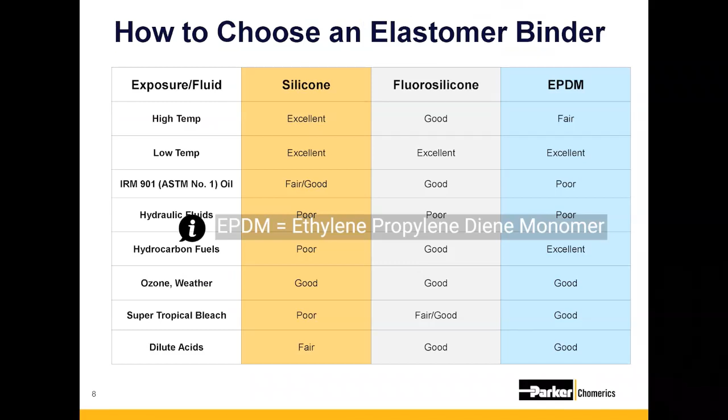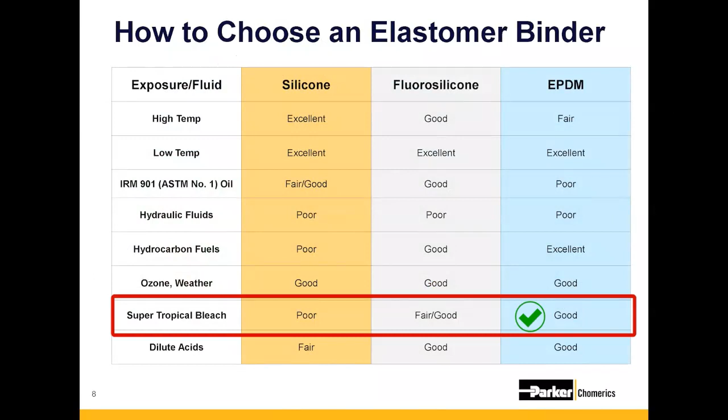So Ben, I see that there's 3 different elastomer binders: silicone, fluorosilicone, and EPDM. I'm working on a ground-based vehicle application right now, and they said something about a super tropical bleach. Yeah, so as you can see, we do have 3 different binder options here. For your specific application, especially when it comes to super tropical bleaches or CBRN requirements, EPDM is definitely going to be the best option. Silicone's a pretty common option for most applications, except when it comes to interacting with hydraulic fluids or various fuels. That's where fluorosilicone is going to be the best bet.

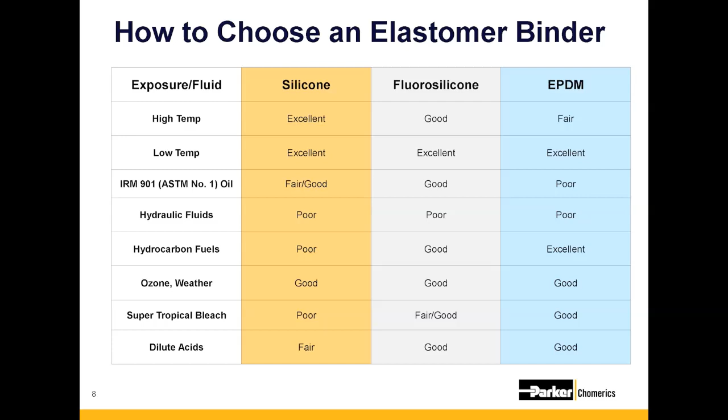So what if I just had a standard salt fog, salt spray requirement? Would I need to use a fluorosilicone or EPDM? No, a silicone should do pretty well in that application.

Okay, and what about choosing a conductive filler? There's a lot of options, and my customer is really cheap, so I might want to use the cheapest one. Is that always the correct choice? Not always. A lot of the different conductive fillers have different requirements and different needs that they meet. For example, some of them, like silver-plated aluminum and nickel-plated aluminum, are going to provide you really high shielding effectiveness, as well as high corrosion resistance on aluminum.

At the same time, if you're looking for very low contact resistance, a pure silver filler might be the best option, even though it's on the more expensive side. If you've got an application that doesn't require high shielding and won't be exposed to the environment, a more economical solution might be nickel-plated graphite.

So once we've chosen our filler and our binder system, I guess it's time to choose a gasket profile cross-section. How do you know which one to use? So there's several profiles, some being solid, some being hollow.

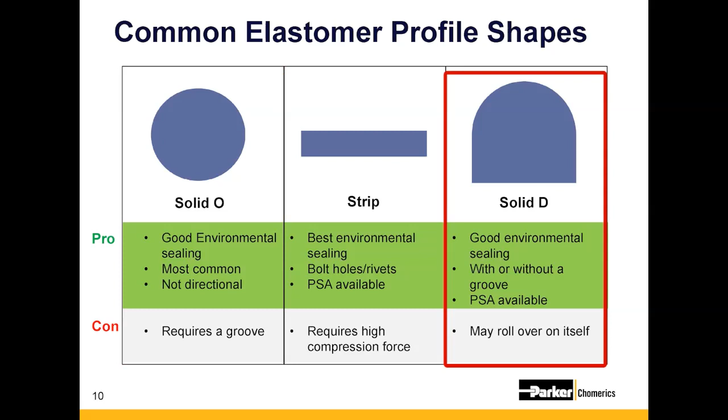A solid D is also a good choice. However, when curving around a corner or trying to slice into a ring, it could have a tendency to roll over on itself. Sierra, what about these profiles? They all look like they serve a slightly different purpose.

So yeah, the typical hollow profiles shown here are better for low closure force. They can be friction fit in the groove. They can take up larger gap ranges and tolerances. For instance, I've had many customers use a hollow mushroom D for boxes where you're repetitively opening and closing your box.

Can you tell me a little bit of the difference between a hollow D and a mushroom D? Sure. Years ago, we had an applications engineer that was designing in a hollow D profile, and the customer had a strip of PSA along the bottom of the D. They noticed that when they were pushing down vertically, the PSA in the bottom of the hollow D would actually come up and delaminate from its ledge. So the engineer at Chomerics created a mushroom D, and the little bump inside actually prevents the bottom of the D from coming up. So it makes it an excellent choice for repetitive opening and closing.

Good question. And from what I know about gaskets, these all seem like they're a lot easier to compress compared to the profiles on the last slide, right? Yes, and we'll get into compression ranges in a couple more slides, but it is very important to realize you can do 100% of the ID, up to 50% of the OD minimum. So these can take up larger gap ranges, as mentioned.

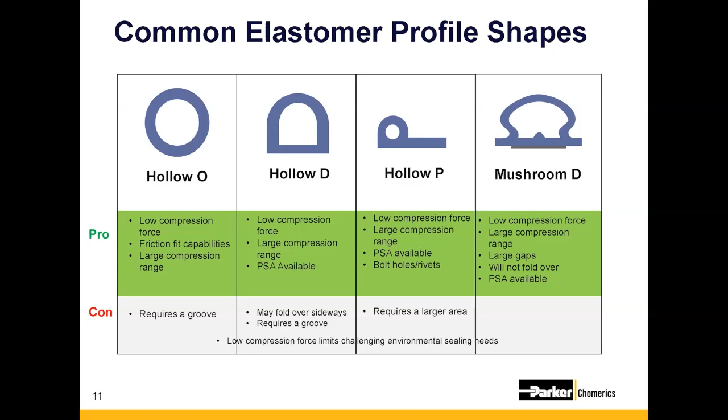And of course, there are many, many custom shapes. So there will be a link to our elastomer catalog, and you can do some light reading and look through all the different profiles that we've made over the years. The general principle that we typically go with is, if you can imagine it, we can make it. We probably have several thousands of different profiles in different shapes and dimensions, all that are relatively easy to design or modify based on customer requirements.

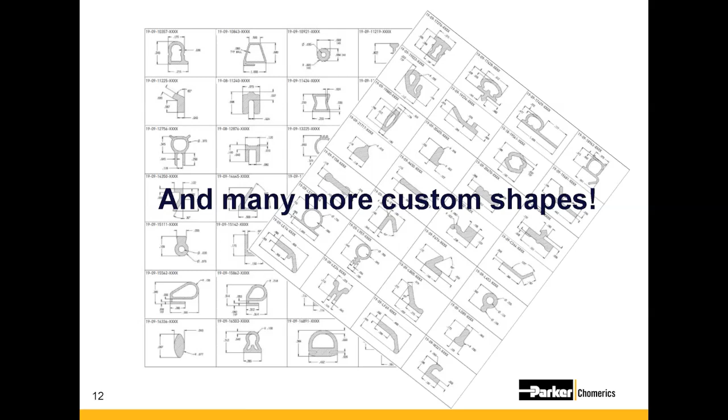Part of this webinar that we really wanted to bring home to you guys was the common mistakes that a lot of people make. There's a lot of different custom profiles you could choose from, 3 to 4, 5 different types of binders, and multiple fillers. So Ben, have you ever heard of an instance when someone chose the wrong filler or the wrong binder? Yeah, a couple times, and fortunately it came out in testing that it wasn't necessarily the best fit, and we were able to take care of it early on. But it's really important to understand the requirements you have going into an EMI shielding application.

So if you've got flow-down requirements from an EMI shielding specification, or understanding the environment that the end product is going to be in, is pretty important when we get to this part of the design process. One of the other things is that you really shouldn't ever have to sacrifice profile qualities in terms of an outside diameter, an inside diameter, or a specific dimension, because there is so much design flexibility in the proper gasket.

And another thing too, with regards to choosing the wrong filler or binder, you don't want to pick a pure silver gasket when you only need 30 dB of shielding. A nickel graphite might suffice. So it's really important not to specify a Mercedes if you're only trying to buy a Chevy.

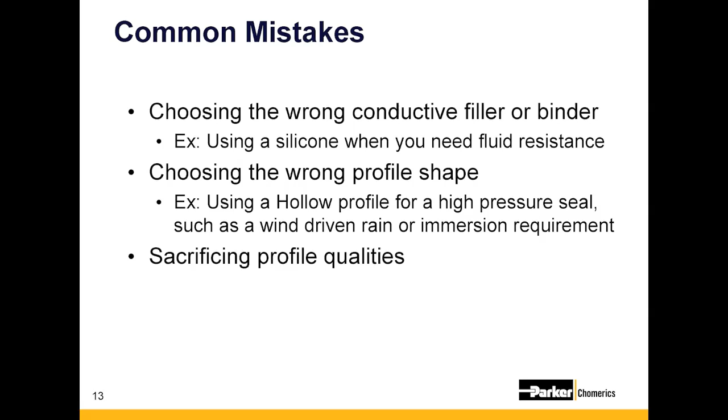In this next section, we're going to talk about overmolded and vulcanized covers. And that means that we take the metal substrate or the plastic substrate, and we actually compression mold this material onto the gasket. It's not glued on, it's molded to, so it's a very robust solution.

Something that can be easily opened or closed if needed. Sierra, I recognize that this section is titled Overmolded or Vulcanized Covers. Can you talk to why they're specifically covers?

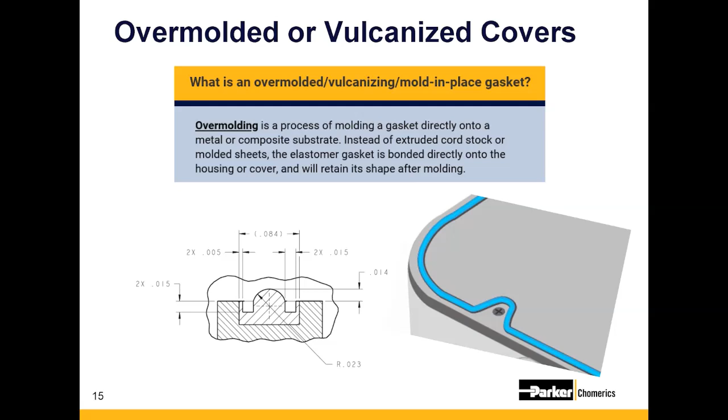The gasket gets molded onto one side of the box or the other, and usually the cover is lighter weight and easier to ship across the country because these need to come back to Chomerics to be molded in-house. Gotcha. What are some of the other benefits of overmolded covers?

Well, like I said, the robustness of being able to open and close and not have the O-ring pop out. I had a customer several years ago and they had designed in a simple spliced O-ring in a groove, and it just kept popping out during installation. They didn't want to spot bond it. They were trying to tape it down. They had to install the cover vertically, so it wasn't horizontal. You'd think that would be a lot easier.

So we actually talked to them about designing an overmolded cover. It was more complex than a simple O-ring, but it saved them immeasurable time and money during the manufacturing process, eliminated a lot of frustration. One of the things was they were paying engineers to come in and figure out the problem, and they're a lot more expensive than an assembly worker per se. So there are a lot of benefits, measurable and immeasurable.

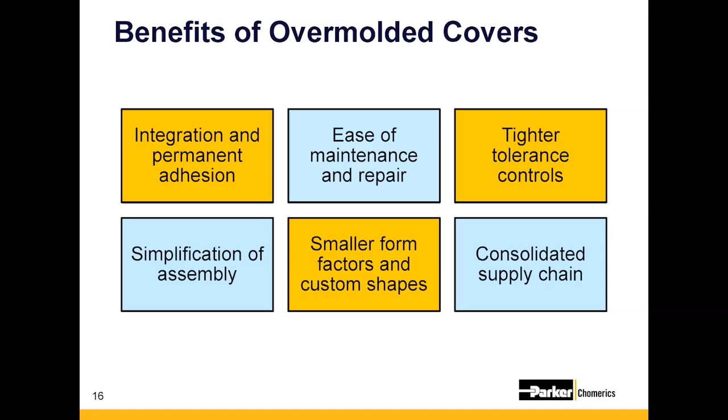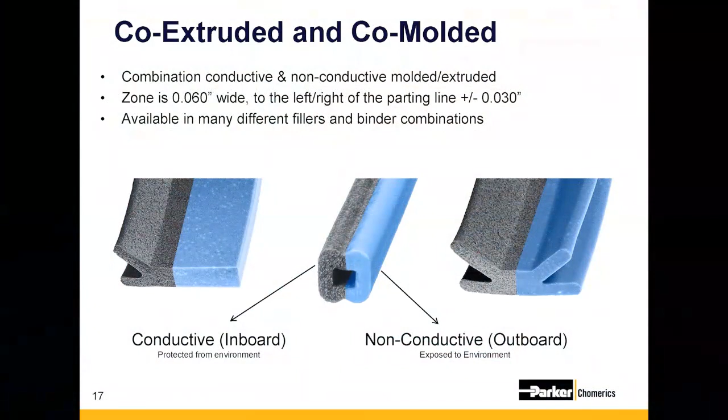Another option for either extruded or molded parts, when there's a really extreme environment, like you're on the deck of a Navy ship or in a tropical location where there's salt fog, humidity, moisture, it can be a huge problem. By using the non-conductive seal outboard exposed to the environment and the conductive seal inboard, blocking the EMI shielding from inside and radiated immunity and radiated susceptibility, it just removes the electrolyte, the water, and protects the conductive gasket from exposure.

So, electrolytic corrosion is something we'll talk about in a few slides, but it's a big deal. So if you have a very extreme environment and no water should get in, this is a very good solution. And these co-extruded gaskets also come in a number of sizes and shapes, right? Yes, actually, there's a whole section in our catalog with several profiles that are already tooled up. But if you wanted to design your own, completely doable.

However, you just have to realize, not with the extruded, but with the molded, you need to have a transition zone, a peak or a valley in between the materials so that they're not molding into each other. So just keep that in mind.

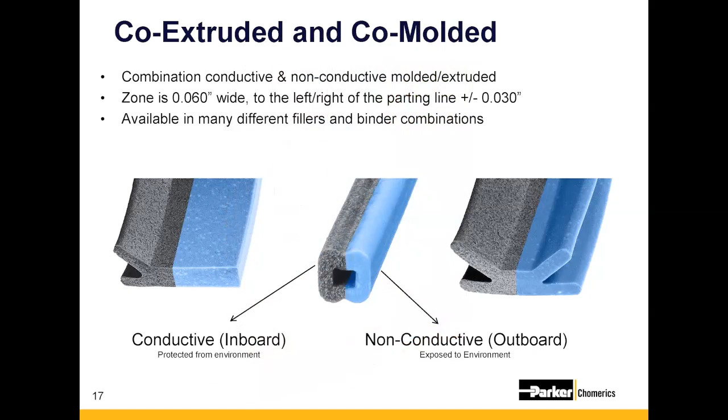Good to know. One of the important considerations when it comes to overmolded or vulcanized covers is that they typically do require a slightly longer design cycle and a longer lead time. Long term, that lead time might actually be shorter. Typically, because this is all done at one place, overmolding requires fewer subcontractors and less shipping back and forth and less supplier management. But overmolded covers typically do require a little bit more design effort and more engineering support.

Interesting. Good to know. I like to tell my customers that if they can let us be the supply chain lead, we have a lot of local machine shops that can do the work and then just drive it over to Chomerics. We mold it and we ship it.

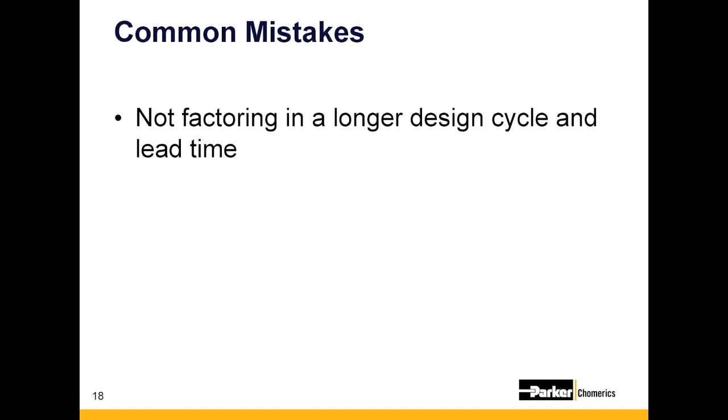All right. So it looks like our next section, we're going to talk about some of the housing and groove design guidelines. Great. I'm ready.

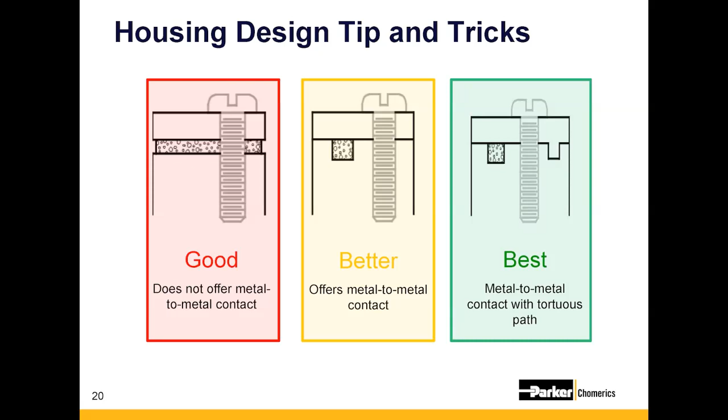So even that example on the left is going to be a great EMI seal, an environmental seal that can last decades if designed well and using proper materials. It looks like the gasket is actually exposed to the environment. Yeah, it is. And that's not necessarily a bad thing, especially considering that these conductive elastomers are meant to be an environmental seal.

Good. One of the important things when considering housing design is also understanding how much force you have to compress some of these gaskets. So for example, cover thickness and bolt spacing are two pretty important factors when considering the type of elastomer, the hardness of the elastomer, and even the size of the housing overall. Sierra, have you had some experiences with this?

I have, yeah, actually. I had a customer that designed a box, and it was probably 6 inches by 6 inches, and they only had one screw in each corner. So there was a lot of leakage going on. But I mentioned to them, I said, okay, look, bolt spacing is to the 4th power over cover thickness to the 3rd. They were trying to use bent sheet metal, and the gaskets are very hard, 65 plus or minus Shore A. So we got them back on track. We reduced the distance between bolts, and we ended up passing the test. Especially because if you look at this equation, right?

Some of the things when it comes to EMI gaskets aren't really controllable. So for example, gasket deflection force, for most profiles or most materials are going to be about the same, but things like bolt spacing or cover thickness might have a little bit more design flexibility depending on how early you are in the process. Definitely something important to look at in the beginning.

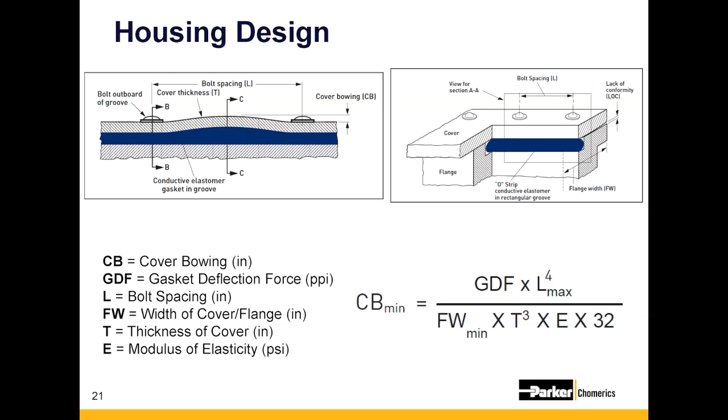These gaskets are filled with free-floating metal particles. So not having the minimum compression will actually prevent the particles from touching and not give you the shielding or grounding that you're looking for. Whereas if you have greater than the recommended compression value, you can actually crush the little particles and reduce the ability for the gasket to spring back after taking a compression set, say in heat or cold environments. It's really important to pay attention to these compression forces.

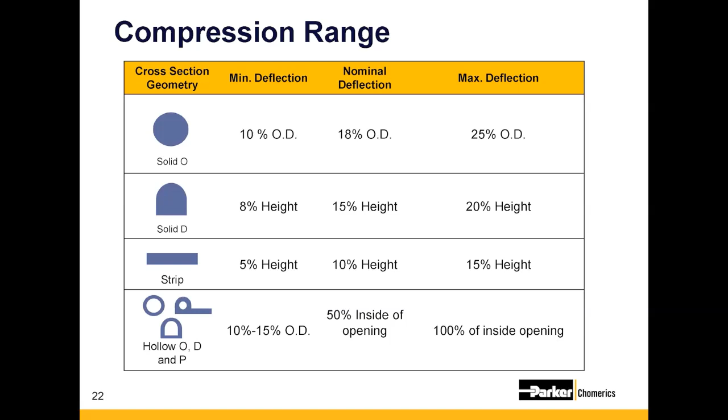And Sierra, I guess the deflection ranges don't really matter when it comes to things like the size of the gasket. So for example, if you had a gasket that's a solid O profile that's 70 thousandths versus a solid O profile that's 1/4 of an inch, you're still looking for that same compression range, right? Correct. Yeah, good question. All right.

So there's always a lot of questions around gasket adhesion options. We've talked already about friction fitting a hollow O into a groove. We've briefly touched on spot bonding. A lot of you have dealt with sheet stock with pressure sensitive adhesive. So it's always important to refer to the elastomer handbook for exact groove dimensions to fit existing profiles.

We have all of the recommended groove dimensions for hollow or solid O's, mushroom D's, but there are certain situations where you can't friction fit, like in a solid profile. So what you need to do, if you're worried about it popping out, is spot bond it. We like to tell you to use a non-conductive RTV to match the binder system. So if you have a silicone gasket, you're going to want to spot bond it with a silicone RTV. Same with a fluorosilicone gasket, you're going to want to use a fluorosilicone RTV.

Ben, do you know why we recommend non-conductive adhesive versus using a conductive adhesive? Yeah, so typically non-conductive adhesives will actually have a better adhesive strength or lap shear force. A lot of conductive adhesives end up sacrificing some of their force because of the conductive particles. Additionally, the conductive particles in conductive adhesive can add to the galvanic mismatch between the substrate or the frame, the gasket, and the adhesive itself, which just adds more to the equation and typically complicates the process.

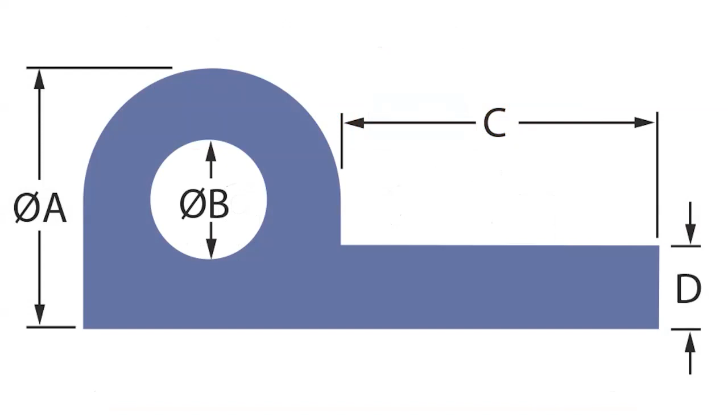So, for instance, we looked at a hollow P design, which is like a hollow D, but with a leg coming out. Sometimes you need to mechanically fasten your gasket. PSA may not be robust enough. It could be a very critical application where it has to adhere, and rivets can be very helpful. Also, compression stops can be needed in cases where you're afraid that someone could over torque the gasket.

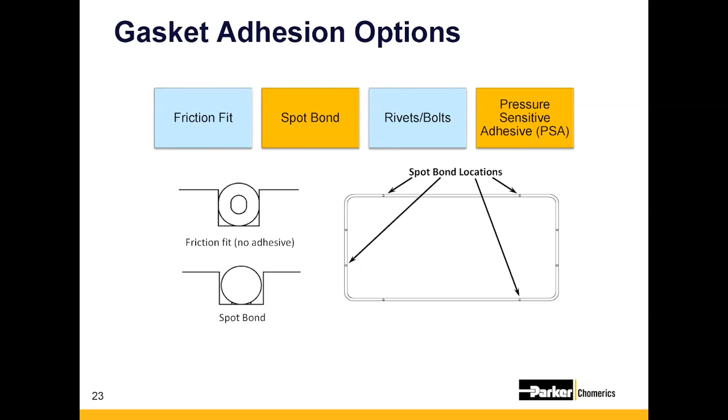We all make fun of the 18-year-old kid on the deck of a Navy ship. He's the one that you design for because you're trying to make it foolproof. So if you are worried about things like over compression of your gasket, use compression stops. If you're worried about the gasket falling off, you can rivet it on.

But yeah, good question. Let's talk a little bit about groove basics. It's a pretty quick slide. We like to use straight rectangular grooves for elastomers. Tongue and grooves can be used with caution. We should try to contact applications, make sure that we've got the right profile if that's what you're stuck with at the time.

Dovetails are a no-go. We do not like dovetails. We'll talk about why, but don't use dovetails. So what you're saying is that we should absolutely never, ever use dovetails if you can get away with it. Correct. We'll talk about why in the common mistakes section at the end.

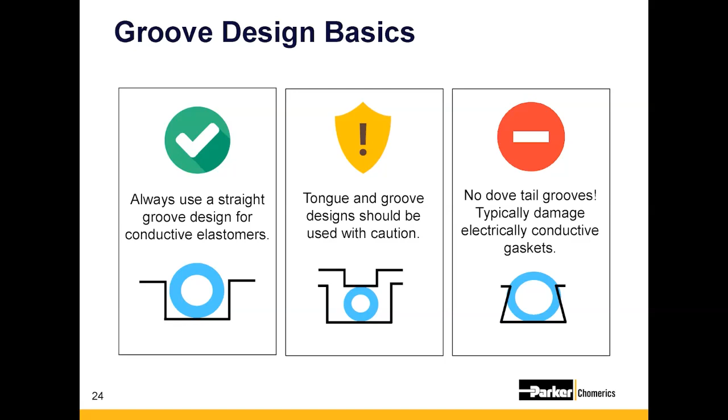Another important thing you have to really consider when designing your housing and your groove is the bend radius. So say you have a hollow O and you design a 90-degree corner, that hollow O is going to pinch. And what happens, Ben, when you pinch a gasket in a groove? Yeah, if you pinch the gasket in the groove, you're really no longer maintaining that original profile that it was extruded as. What that means is you're probably not getting the ideal sealing at that point where it's pinched or bunched up. You're also probably not getting a great electrical contact, which could sacrifice some of your EMI shielding.

So you're saying if we pinch, you can get leak points for water and EMI? Exactly. So yes, you want to make sure you have a minimum bend radius, which is in the catalog. Keep that in mind.

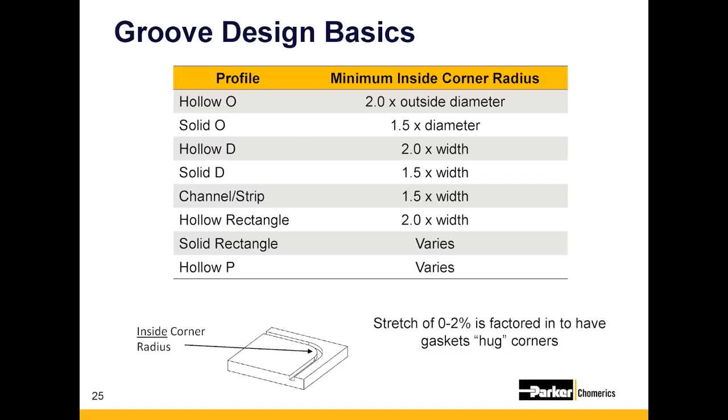One of the types of shapes that we haven't talked about yet is a die cut gasket. With a lot of shapes or applications, we can take large sheets of material and die cut standard or non-standard shapes out of that. That could be rectangular, or it could be all kinds of custom designs based on how the gasket needs to interface with a particular housing. Some of the key tips when it comes to die cutting is actually making sure that you take into consideration the wall thickness to the gasket ratio thickness.

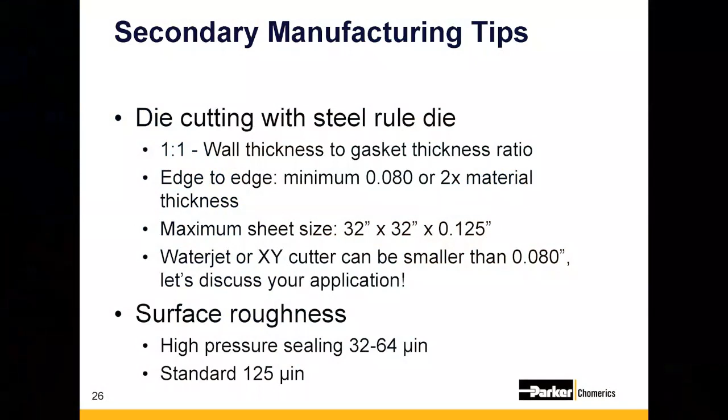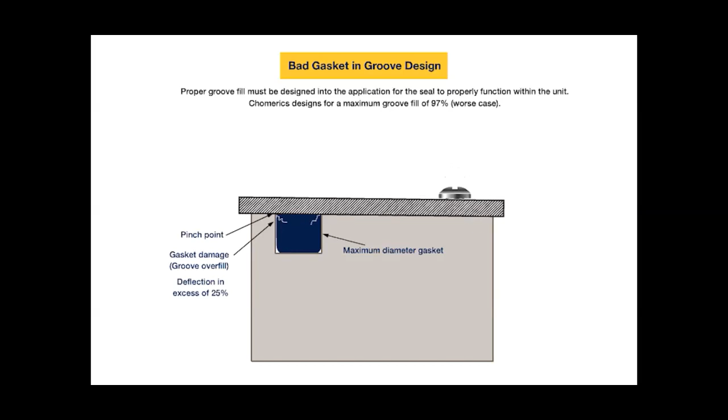Here's a great example of what it looks like when you design a gasket that's too large for a groove. So what you see here are pinch points and potential damage to the gasket, while at the same time significantly increasing any kind of compression force needed to compress this gasket.

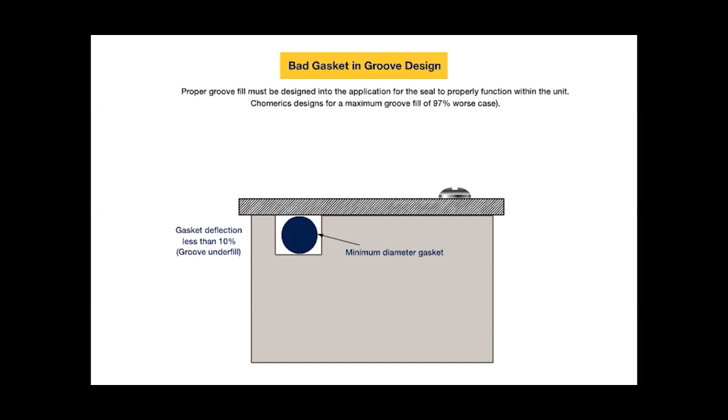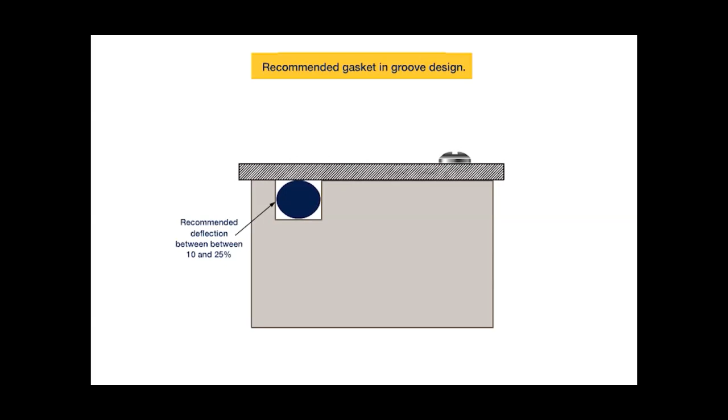Finally, we've got the Goldilocks gasket. It's a gasket that's designed properly for the groove to make sure that there's no overfill of the groove, so the gasket isn't being damaged, while at the same time compressing the gasket the proper deflection range, in this case for a solid O, between 10 and 25%.

Sierra, I know you wanted to touch on some of the common mistakes when it came to housing and groove design. Yes, there are some very important ones. The one we've been alluding to is not using a dovetail. The reason why is conductive elastomer gaskets should always be designed in compression. We don't want to design in shear or tension or rotation of any kind because of FOD concerns.

So you can install a gasket into a dovetail groove. It could shear on the way in. If you're trying to take it out, it could shear on the way out. The other point is that elastomer gaskets need a minimum of 2 points of contact to create a ground or a shield. If you have a gasket that is underfilled in a dovetail groove, it could give you as little as only 1 point of compression, which is not going to give you shielding or grounding or water sealing for that matter.

Another common mistake is trying to apply grease to the gasket. The point of grease is to reduce friction, and you're not using this in friction, so that's one common mistake. But the other, more important and less recognized issue is that if you put too much, it could cause a dielectric barrier between your housing and your gasket.

Ben, have you ever seen anyone try to use conductive grease before? It's honestly becoming less and less common in applications to use conductive greases. Typically they aren't really needed, and it touches back to one of our points earlier about adding additional materials that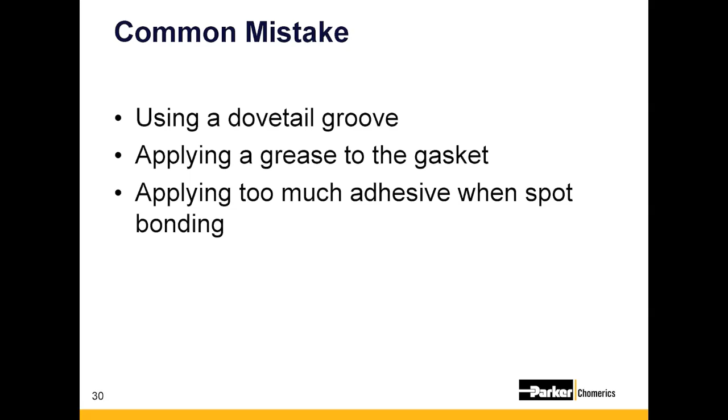In our last section before the Q&A, we're going to touch on some of the corrosion and environmental factors that need to be considered for EMI gaskets. There are two types of corrosion: galvanic, which is caused by two dissimilar metals corroding, and electrolytic, which is caused by oxygen or water, say rust.

And it looks like some of the different conductive fillers are actually better for minimizing that galvanic corrosion, right? Absolutely. So there are very low-cost materials for industrial applications, like nickel graphite or carbon, that aren't as corrosion resistant but are good enough to do EMI shielding. Then you've got your high-octane materials, like nickel aluminum or passivated silver aluminum, which are very galvanically compatible with housing materials like stainless steel or aluminum.

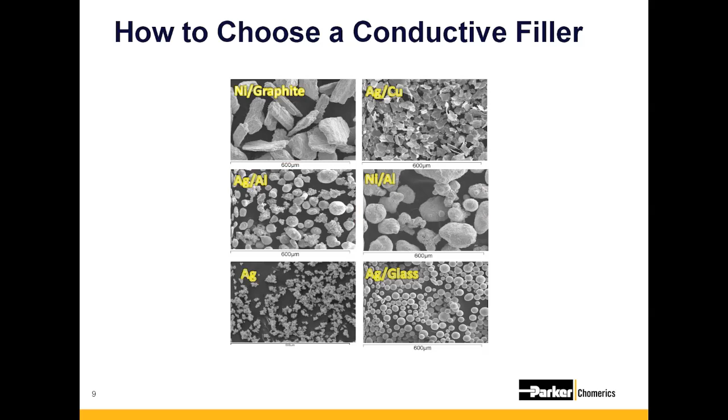One of the other ways to minimize galvanic corrosion would be to attempt to eliminate that electrolyte -- things like salt fog. If you're not directly exposing it to the conductive elastomer gasket, you shouldn't have much galvanic mismatch. Good point. That's actually where possibly co-extrusion might come in, where half of it's conductive and half of it's not. That might be a good opportunity.

So Ben, what are some common mistakes? When it comes to housings, not only is designing a proper housing a big deal, but the housing material also starts to have an impact. For example, we would almost never recommend magnesium housings, partially because they don't stand up well to corrosion or most environmental factors, as well as galvanic corrosion against just about any EMI seal.

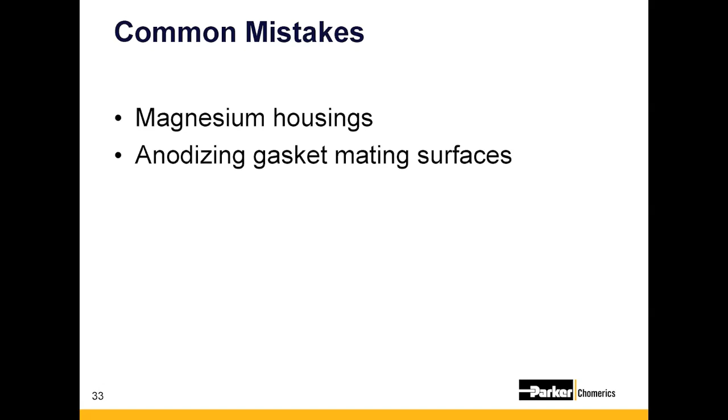One of the other things that's important to note is EMI gaskets and conductive elastomers need to mate up against a conductive surface. What that means is an untreated or chem-filmed aluminum, for example, whereas anodizing a housing substrate will actually do the opposite and create a non-conductive bond between the gasket and the housing.

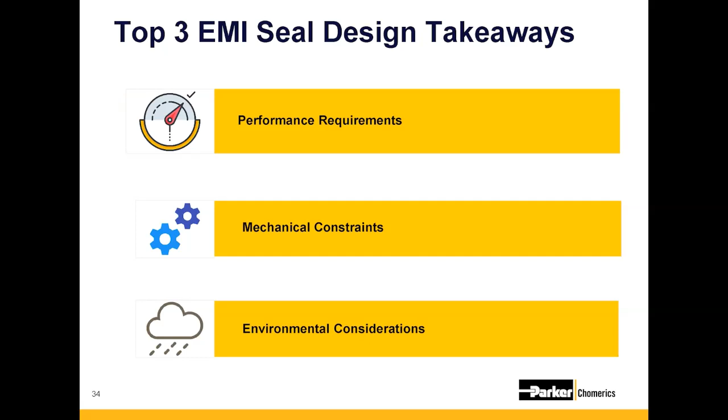All right, everyone. We've gone through a lot as far as housing design and corrosion concerns. I feel like the top 3 EMI seal design takeaways today were: look at your performance requirements -- what does your customer need as far as shielding effectiveness goes, what about aging requirements, application requirements like temperature and humidity, mechanical constraints, your cover thickness, what kind of real estate do you have for a groove?

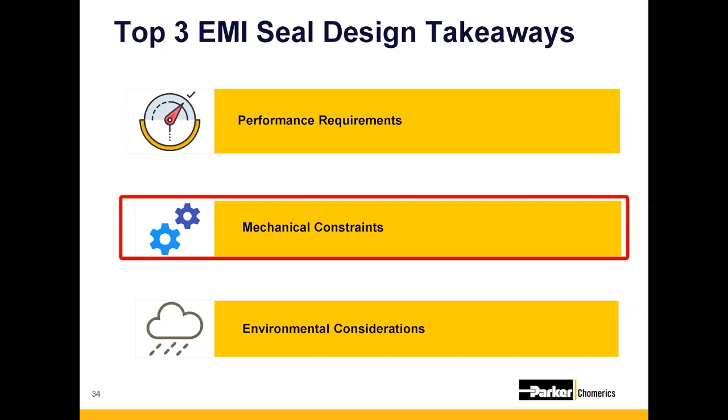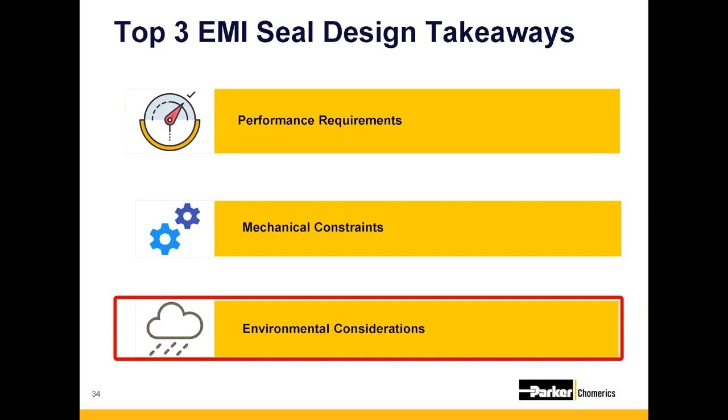Are you able to get a good bend radius around a corner? And then environmental considerations -- is this going to be indoor, is this going to be outdoor, is this going to be on the deck of a Navy ship in a very corrosive environment? So there's a lot of things to consider. With that, I will thank you guys all for your participation, and we will unmute ourselves and ask if there's any questions.